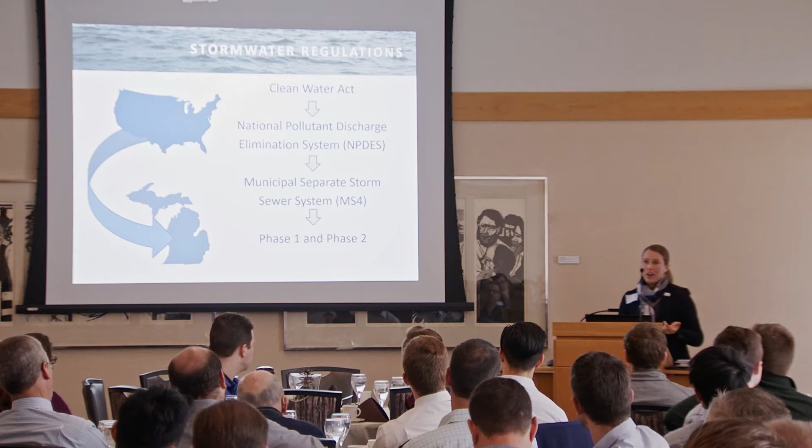All right, so I wanted to take a step back, make sure that we're all on the same page when talking about stormwater regulations. So in West Michigan, when it rains or when it snows, like today, and that snow melts, all of that runoff flows over our impervious surfaces, enters a storm drain or some other sort of stormwater infrastructure, and then goes directly to our local lakes, rivers, and streams. It doesn't go to a treatment plant. So that means that our communities that own or operate a separate storm sewer have some extra regulations to follow in order to make sure that that water isn't polluted and impairing our local waterways.

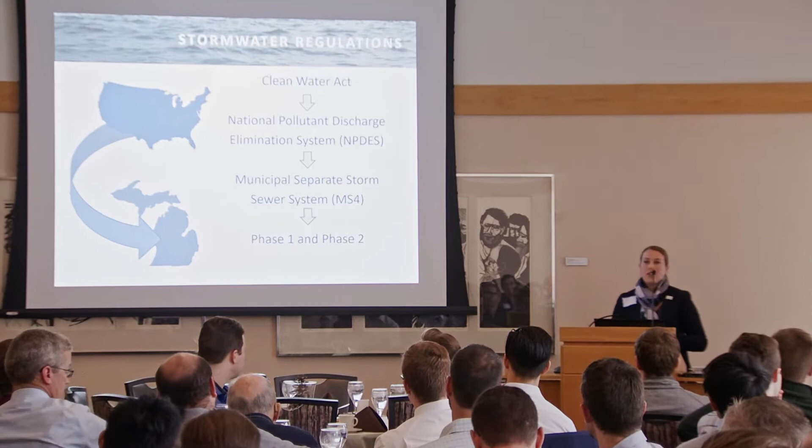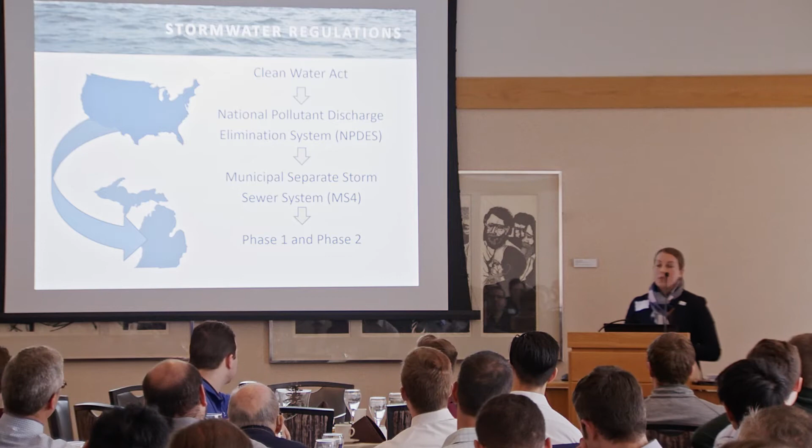So at the federal level, these regulations come from the Clean Water Act, and locally, those are implemented through the Michigan Department of Environment, Great Lakes, and Energy, or EGLE. In our area, we have Phase 1 and Phase 2 communities, which are really just based on population. So the city of Grand Rapids is a Phase 1 community because they have that many people that live in the city. All of our other communities are Phase 2. It just means that cities with larger populations have even more stringent regulations to follow.

Today though, when you're asking us questions and when Brad and I are talking, we're specifically talking about the standards in the Lower Grand River watershed.

So communities in the Lower Grand River watershed have been working on a regional scale for a really long time. The current stormwater permits that we're working under were actually issued in 2003. The permit expired in 2008. We're still working under that 2003 permit. The permit reapplication to the state was due like 2015, 2016, and it's taken from that time until now to come through negotiations with the agency and get something that the communities and the agency are happy with.

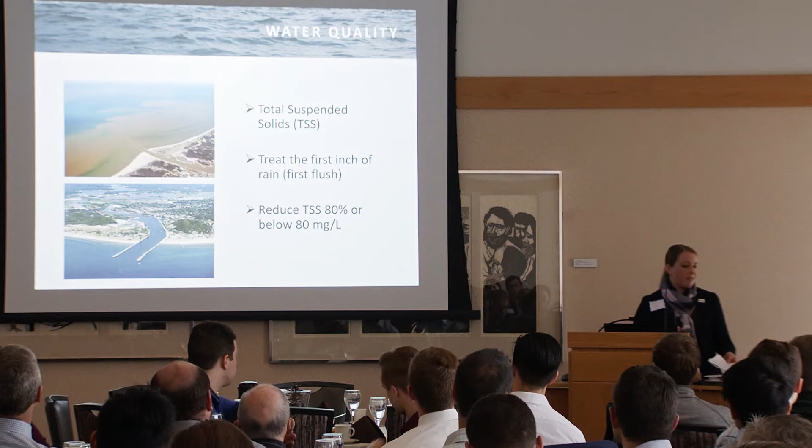Thank you, Kara. Before I get into the weeds here a little bit, I wanted to introduce a few folks that were part of our committee.

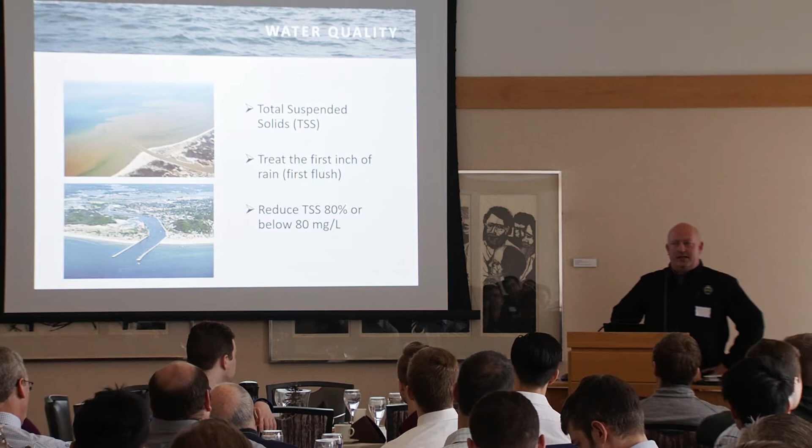Looking over at the table over there, we have with us Ken Yonker, the County Drain Commissioner from our office. And next to him, Angie Levitas. Most of you may know her, she's going to be the one that's going to make sure you do this right. Also from our committee, I got a list here, I'm not sure if everyone's here. Scott Connors is in the back from Walker. Rachel from Walker, right here. Tim Bradshaw from Kentwood. Wendy Ogilvie with Metro Council.

Dan Tabor, City of Grand Rapids. Carrie Rivette was also involved, I don't think that she's here. Steve Oosting from Prein & Newhof has been helping us. He works or does reviews for the city of Rockford, and they've been actually, I think, on one site, right, Steve? You've implemented the new rules. Myron Erickson from Wyoming, is Myron here? I don't see him. Also, Rick Soleil over on the side. Jim Beakey's also been involved in some of these, and there may be some I've missed.

So that's the committee, and we've been working for quite a while on this to get this going.

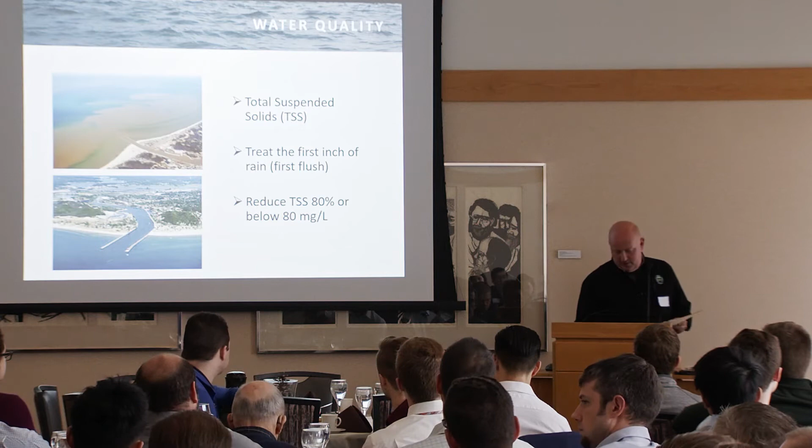It treats the first inch of rain, that's the runoff from the first inch of rain, so there's a difference between those two. The way that's going to be accomplished is by implementing the green infrastructure stuff.

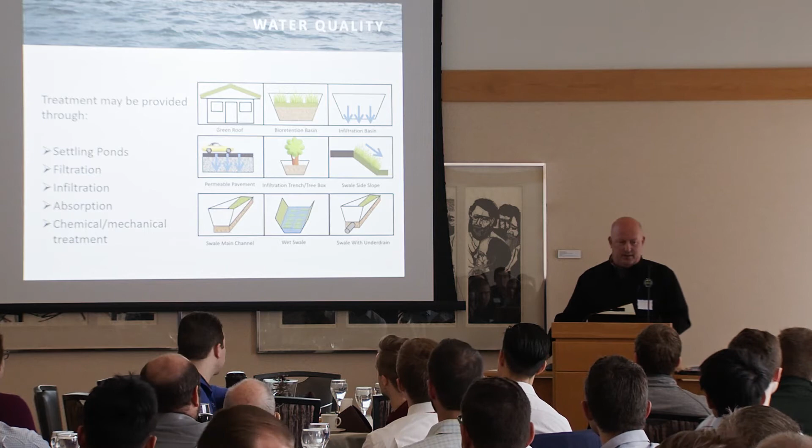The second piece is the channel protection piece. And so while we've done a good job at reducing peak flows in the past down to pre-development levels, we're now going to be required to reduce volume of runoff. And so this is going to have to be done up to the 2-year 24-hour rainfall event. That number for our area from Atlas 14 is 2.56 inches. So you'll have to run the existing condition and the proposed condition and deal with that difference in runoff volume.

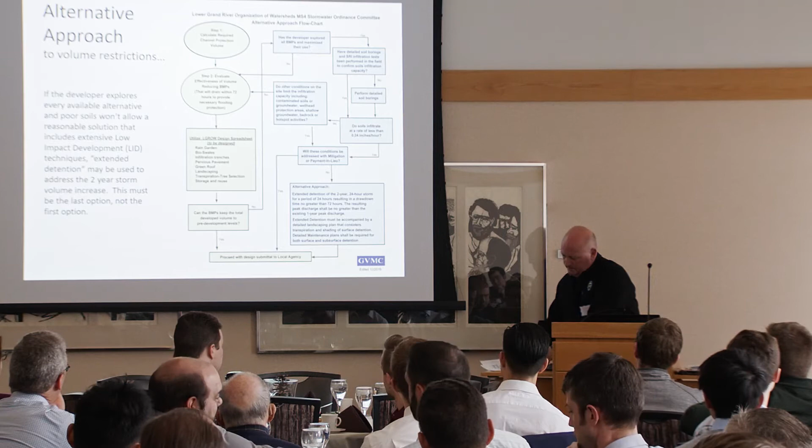But at least we do have an alternative approach for these sites where either infiltration isn't possible because of heavy soils, or maybe there's high groundwater, or maybe there's some other issues that we'd have to deal with. So this spreadsheet just kind of leads you through a decision matrix to get to that alternative approach. That's an introduction to kind of the changes that are made.

I guess on this last sheet, I'd like to, if any of us can answer any questions, generally in terms of the manual itself. Are there any folks here that are using the manual yet, besides Steve? So maybe. I wanted to mention that our schedule for this, we are looking to implement this the first of the year. So you'd have to hurry and get Angie your developments this month if you want to get in front of that.

And she's on vacation for the rest of the month, so. I guess we'll handle any questions that you have, and I decided, since I saw my nephew here, that he's going to answer all the questions. He's an engineering student, so.

No. If you have any general questions, we can try and answer them now. Or else I'll turn it over to Bob, besides the spreadsheet stuff. I'd like to compliment you on putting an edited date on that, so if it's reproduced later, you'll know what you're looking for. You're welcome. Okay, I'm going to turn it over to Bob, and he's going to go through the spreadsheet.

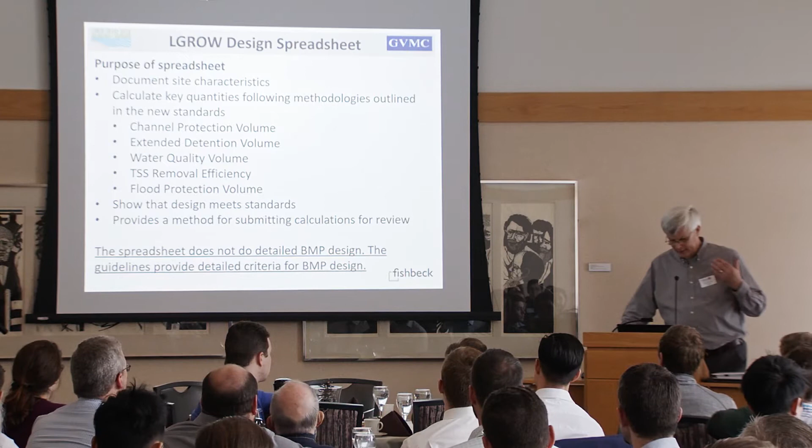The spreadsheet does not do detailed BMP design. It's really there to say these are the volumes, and then once you've done the design, you can document that within the spreadsheet so that you can show that the design meets the standards. So it does provide a way for submitting the calculations for review, and hopefully that will simplify the review process.

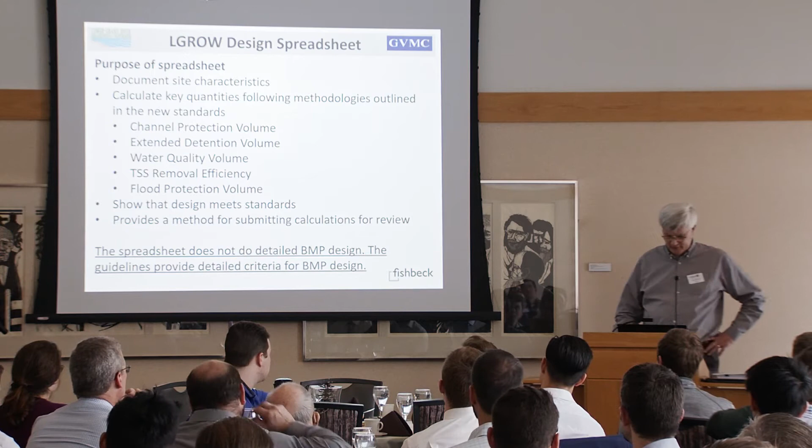One of the concerns that's always raised with a tool like this is I put in numbers and I get out results. How do I know they're right? How do I know they're accurate? What are the equations behind this tool? And when we open up a spreadsheet, we like to look for the equations. That might be hard to do. It's a fairly complex spreadsheet just because it's got to handle a lot of different conditions, a lot of different cases, and it would be very difficult to track down the key calculations. So we've provided some other ways to validate, verify the numbers that you get.

First of all, every calculation that's done in the spreadsheet is outlined in the Stormwater Standards Manual. There's a documentation tab in the spreadsheet itself that you can go to find the equations. When you get to certain points within the spreadsheet where you have to make some decisions, there are some internal notes that you hover over and you see, and that will help with the decisions.

And again, as I mentioned before, there's the tutorial, and so I do recommend that as you start into this thing, look over the tutorial, look over the results there. Another thing I always suggest is just take a simple case study and try it, where you can easily make the calculations. So use a simple case to test the calculations. So there are a lot of ways to get guidance and to do some sort of validation.

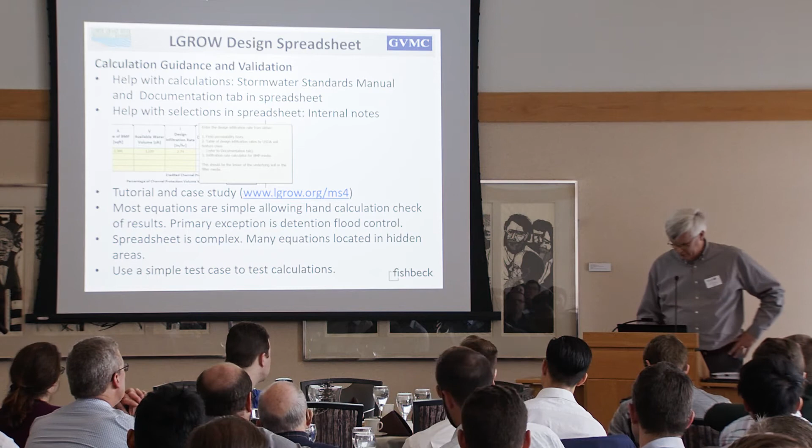One of the major changes that occurred, I think it was about a year ago that we decided to implement a fairly sizable change to this thing, was that we introduced sub-catchments within the spreadsheet. So a given site might have some distributed BMPs that handle channel protection, which is associated with a 2-year rain event, or associated with water quality, which is the 1-inch rain event. But then larger events will eventually discharge to a flood control detention or retention pond.

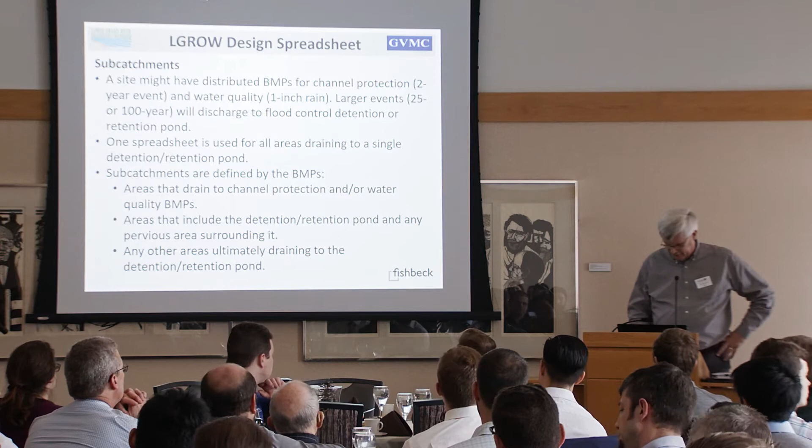So one spreadsheet would be used for all areas that drain to a single detention or retention pond for flood control. And then the subcatchments within that would be areas that drain to individual BMPs or to the area just surrounding the detention pond. So you would first have to take the site and split it up into various subcatchments to use the spreadsheet.

So this is the case study. I'm going to run through a numerical example later on, but it's not for this one. This is the one that's in the tutorial, and this is a little bit more complex than what I'm going to attempt to do today. So in this particular example, we have a site with parking lot and some roofs, a vegetated roof, some single-family homes, streets. And so in the case study for the tutorial, this was subdivided into 6 subcatchments, 6 separate areas.

So sub 1 is on the upper left, where you have some grassy areas and a parking lot, which is draining to a rain garden with a vegetated filter strip for pre-treatment. That then eventually discharges to the detention pond via a storm sewer. Sub 2 is a vegetated roof, and any overflow from the vegetated roof discharges to sub 3.

Sub 3 is a roof and pervious pavement, a small area of impervious that discharges to a minimal disturbed area, and so these are all pieces of this process, and that eventually goes by way of storm sewer over to the detention pond. Sub 4 are the single family homes, and the runoff from there is treated with a bioswale. Sub 5 is just a road, which eventually drains through catch basins and onto the detention pond.

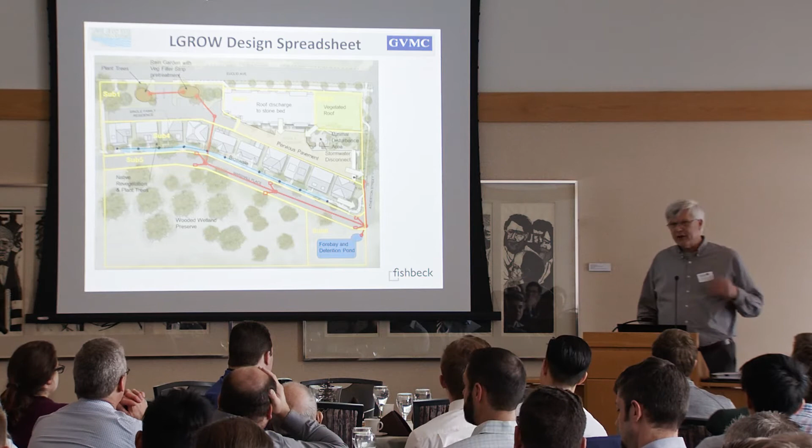So the first step would be to take the site and divide it up into these subcatchments. And it may be just 2 subcatchments, or it may be hopefully no more than 10, because that's all that you can do in the spreadsheet. So there's a limit. So that's really the first thing to understand, is that there are subcatchments essentially defined by the BMPs.

So getting a little closer to actually bringing up the spreadsheet. So the spreadsheet has 15 visible tabs, which means there are some that are not visible, and I think that number is something like 10. So there's a summary tab where you put in some preliminary information and you get some results out related to channel protection and water quality.

Then each subcatchment has its own tab, and so they're called sub 1 through sub 10. And if you only have 2, you're going to use 2. And if you need 11, that's a problem. Then for flood control, one of the ways to calculate flood control is by routing a hydrograph through a detention pond. And so there's a tab for calculating time of concentration if you need that.

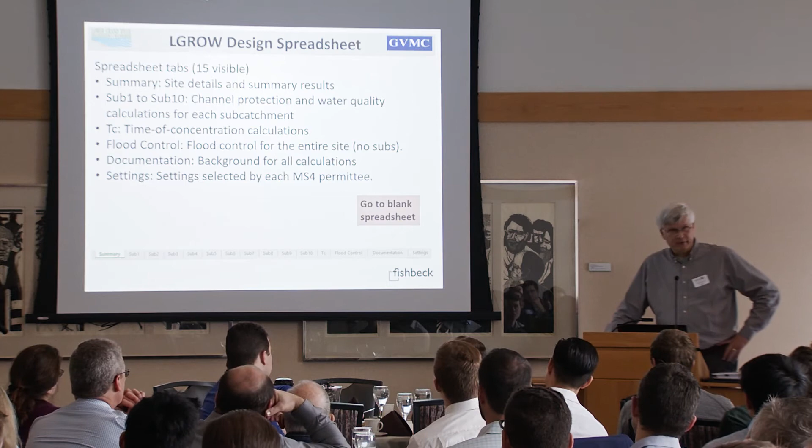Then there's a flood control tab where you can then look at the flood control volumes and some additional summary information. And then there's a documentation tab and then a settings tab. And the settings tab is where you'll find some of the local community information.

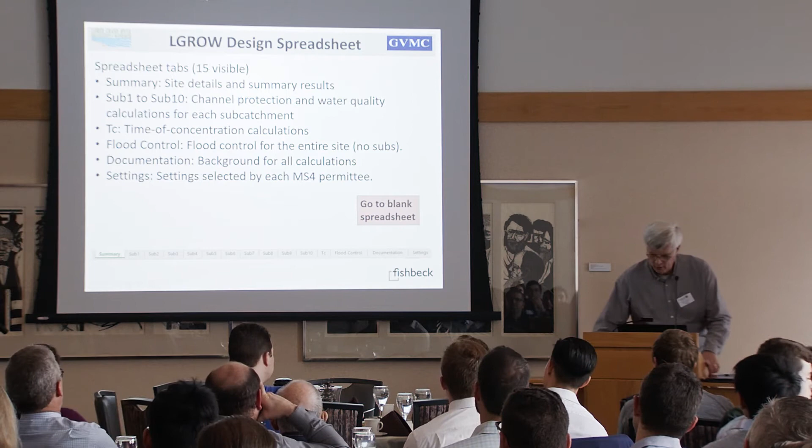So hopefully this will work properly. There it is. Did it all fit on? No, it didn't. Let's see, we see column C. It's pretty close. Well, I can bring it in just a bit here. Want to make sure everybody can see most of it. Okay, that's good. If we get column B, that's great.

So this is the summary tab, and so it has some disclaimers at the top, and you see this is the design spreadsheet for municipality of XYZ. Somewhere in Kent County is XYZ, I'm not sure, but if this is for the City of Kentwood, that version would have City of Kentwood on the top.

So this is the site summary page, and all of the yellow cells are where you type in information. Some of the green cells are pull downs, and there are check boxes. So you put in some information about the developer, location, address, and so forth.

And there are a number of things here. You can see when I hover over drainage district, it says indicate whether site is located within a county drain district or a municipal stormwater district and provide name. So that's just some of the information that has to be provided for the site. Is there a watershed policy? Is this a redevelopment? And so forth.

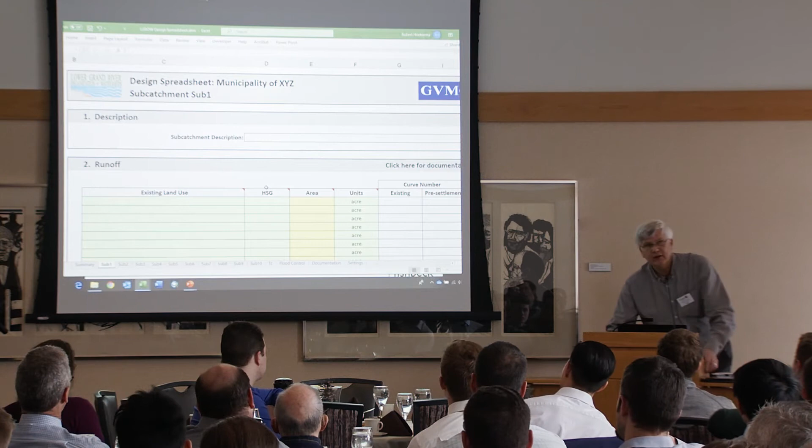So then the subcatchments, and I'm going to just go through these quickly because, again, I'm going to do an example in a minute. You specify the runoff information, land use, soil type. Then you've got a place where you can specify how you're going to meet the channel protection volume. Then you have a place where you can find out what the water quality volume is going to be. And then an area where we can do the TSS accounting. That's the scary part. And so there's one of those for every one of the subcatchments.

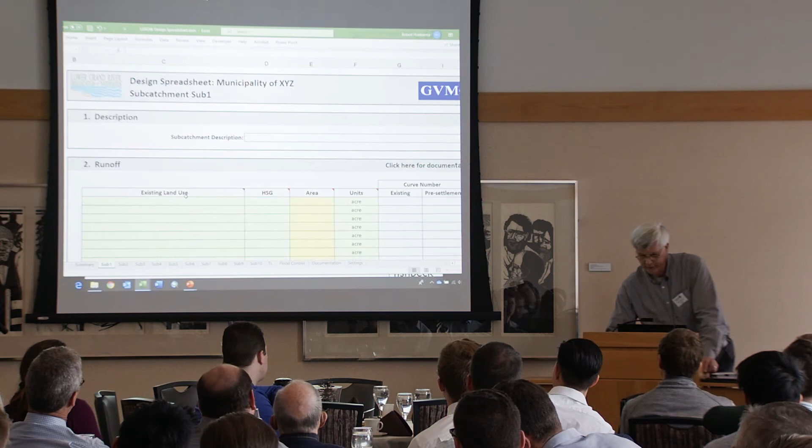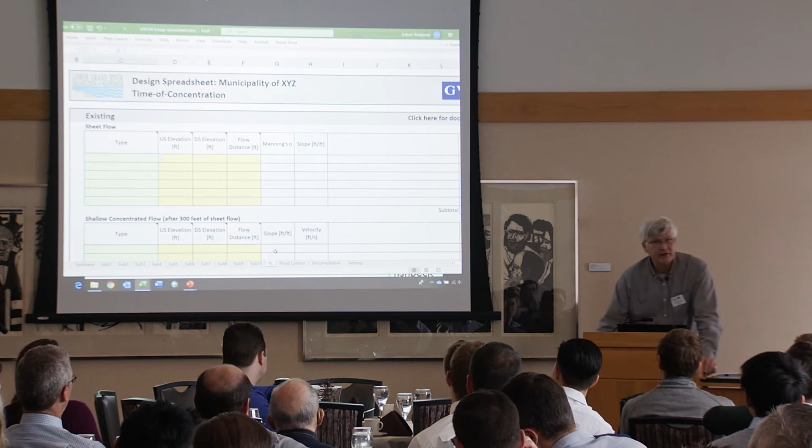Let me go over to time of concentration. In the spreadsheet, when you're doing flood control, you can either specify your own time of concentration or use this tab to calculate it. And this is basically standard TR55 time of concentration calculator. And then the flood control tab, at the top of that is where you say, am I going to specify the time of concentration or am I going to let the worksheet do it? And if I specify it, I can put in numbers here to give my own value for time of concentration.

Once I have that, it will calculate the required storage volume for flood control or for a retention basin. Okay, and for flood control, there's actually a little button that has to be pushed because it goes through an iterative process calculating the size of the detention basin to get the correct peak discharge. Okay, so we'll see that work in a little bit.

There's a documentation tab, and here are where all the equations are. And you can pretty much use that to check all of the calculations for a very simple case, with the only exception being the flood control volume for detention. That one is a little harder to check because that's much more complex.

Then we have a settings page, and this is where we have our municipality of XYZ, and maybe that's going to be City of Grand Rapids or Kent County. Here's where the local municipality can choose whether the channel protection volume basis is, let's get the little button here, existing or pre-settlement or user selectable. Same thing for the flood control event. Is it 25-year, 100-year, or user selectable? Information about the peak discharge limit for detention, flood control, rainfall information, and then precipitation data. So this page would be locked down by Grand Valley Metro Council and set up for each individual community.

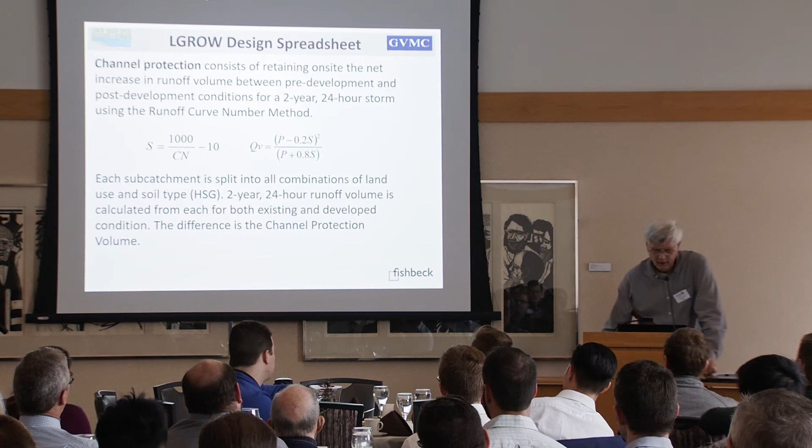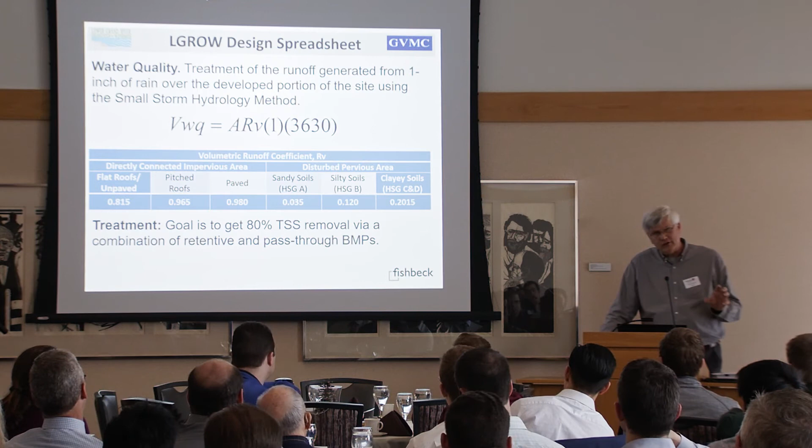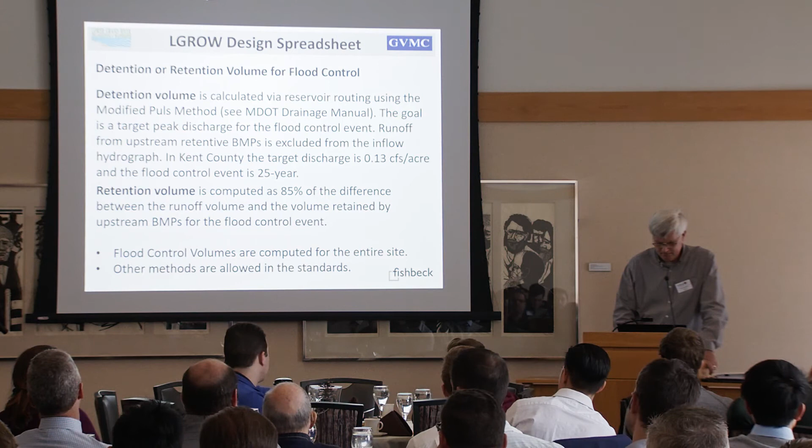Yeah, so I wanted to do a very simple test case or demonstration case for this presentation. I don't even have a picture of a site. I didn't even want to think about that. I just wanted some numbers to throw in, right? So I've got 2 areas that are draining to a detention pond. The first area is 4 acres, all hydrologic soil group B soils. Area 2 and the detention pond are each 1 acre with very heavy soils, so hydrologic soil group D.

The existing condition for all areas is open space fair condition, and these are things right out of the CN number table. Area 1, when it's developed, we have 1 acre of flat roof, an acre and a half of parking, half an acre of native revegetation, 1 acre of open space with a rain garden with a filter strip. And the rain garden here is going to be sized for the entire channel protection volume.

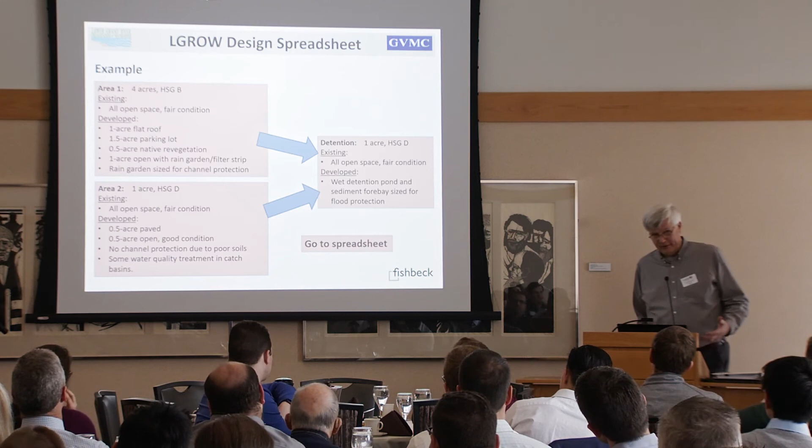Area 2, since it is type D soil, we'll assume the alternative approach of extended detention. And so this is going to be half acre of paved, half acre of open and good condition, no channel protection due to poor soils, but some treatment of the TSS just by the fact that we have properly designed catch basins. And then there's the subcatchment for the detention pond.

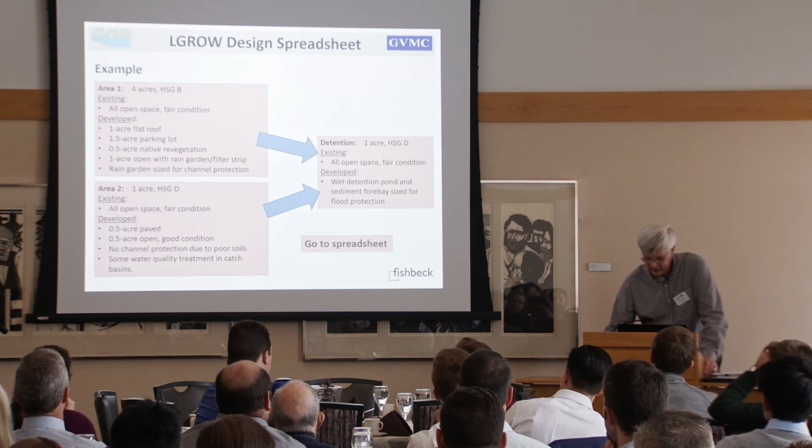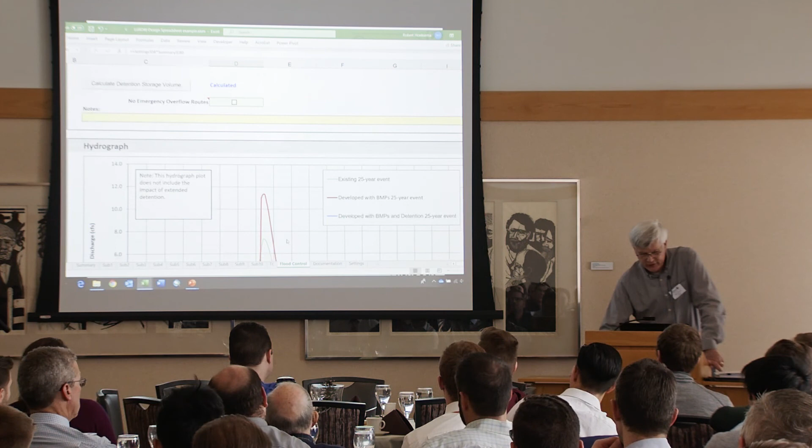And then below this, we got some nice pretty hydrograph pictures and a more complete table giving runoff, peak discharge, runoff volumes for 1, 2, 10, 25, 100-year events. And the disclaimer, which is important. So that's the spreadsheet.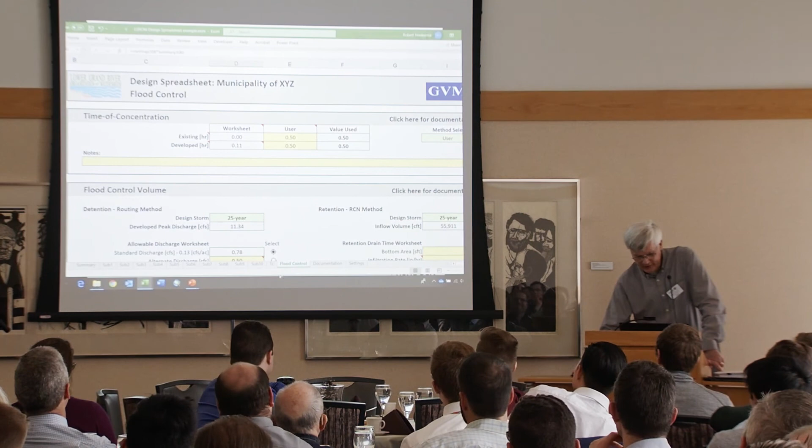I know it's a lot to take in at this point, but that's the tool that's available for the new standards. And so we will take questions. Brad, Kara.

Oh, thank you. How is this going to impact Lake Michigan water levels?

Not at all. It's not going to hurt them. Shouldn't. It should make the water cleaner. The intent of the channel protection volume is to retain water onsite.

So I guess we didn't really get into the nitty-gritty requirements of this, but these standards are going to apply to all developments and redevelopments that are equal to or greater than 1 acre in size. So keep that in mind when you're designing your sites.

Like we said, Kent County, we're expecting that the drain office will have their permit January 1st, and then all of the other MS4 communities in the area will kind of roll out shortly after that. Thanks for coming and bear with us as we work through this thing.